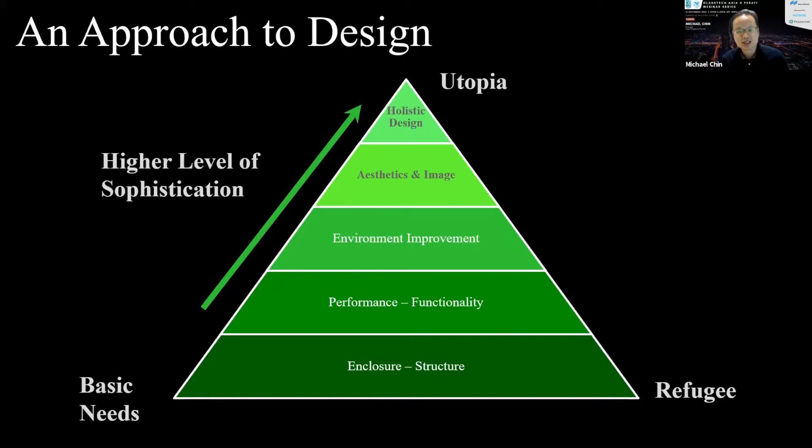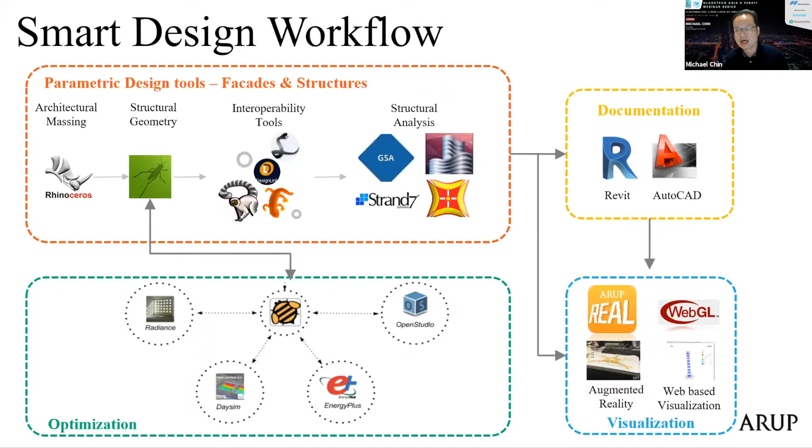And then facade optimization, your thermal performance, and then on the right hand side you've got your documentation, right? Revit, AutoCAD, something that we're very familiar with, and of course now we are even talking about visualization and augmented reality and all that. So without tools, without software, without digital, that's a bit hard to establish, although the thinking has been there for quite a while.

So today I will talk about 3 topics actually that we have been working on at Arup. First one is facade canvas. Second one is actually how we solve complex design issues, mainly our geometry and modulation studies. And of course, the last one is digital inspections.

So facade canvas is an in-house tool that we developed, right? And it's essentially our definition of parametric design exploration. We do exploration from time to time, and what we call optioneering, day in, day out, and what is the quickest way to do it. We want to do it as efficient as possible, because this process is essentially a circular process that goes round and round until you get a solution that you want.

And in the olden days, we kind of look at things in 2D, right? Obviously architects have their drawings, their elevations, their GAs, and of course when it comes to a different consultant, the structural engineers have one set of drawings. The facade engineer - at that time we don't even have facade engineers - he will be looking at his own set of drawings in that sense, and all of that becomes a bit hard to really understand, and also capture. Especially when you want to do design, it becomes even more difficult.

So now, with software, we are looking at single source of truth, right? We are looking at one model. Daniel talked about BIM and all that, and it's so common now. But essentially, for us facade engineers, we want it even more important that we do options again and again. And now we're even incorporating structural engineering tools into the software, what we call facade canvas.

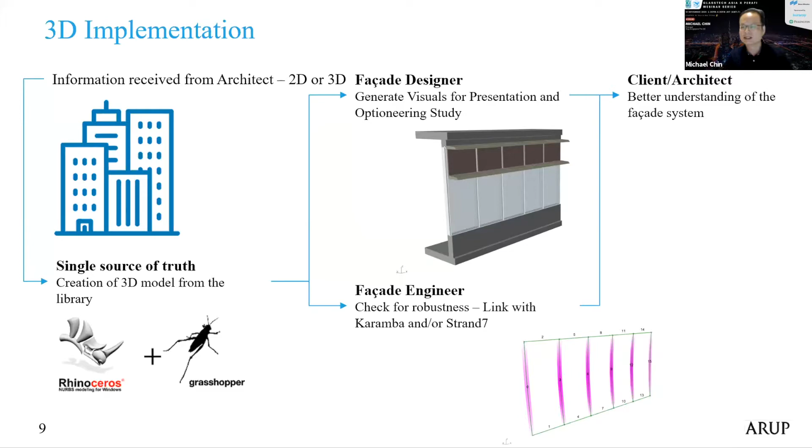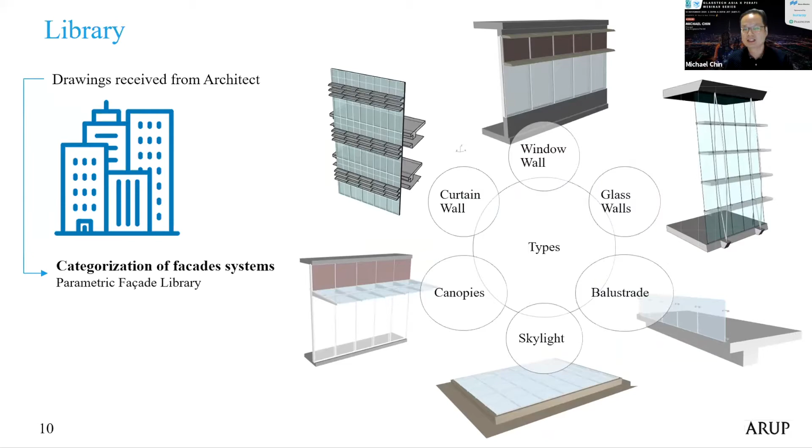So we are developing libraries, and you can see how we categorize the different facade systems. Within all of these systems will be quite familiar to you. Very often, for example, for curtain wall, we look at different options. So in one option you move the spandrel up, and in other options you increase the vision panels, or move the sunshades up and down.

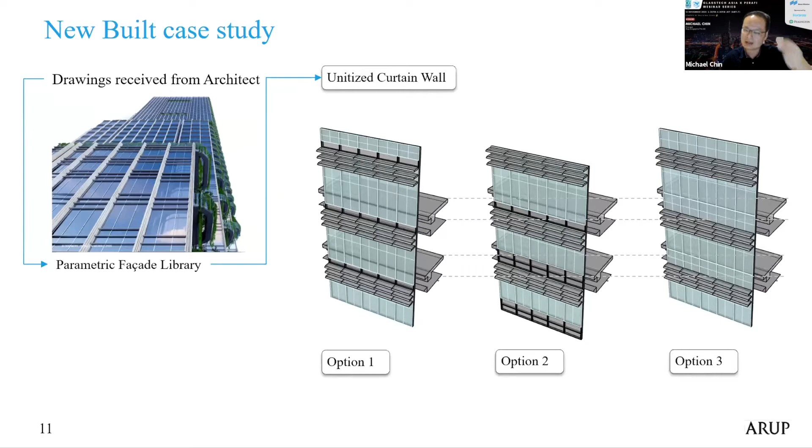When we were doing AutoCAD, that was a quite difficult process. Although we can imagine it, we don't really know how to convey that. So essentially using the software, built into a series of Rhino and Grasshopper scripts, we can quite easily get all of these things done very quickly.

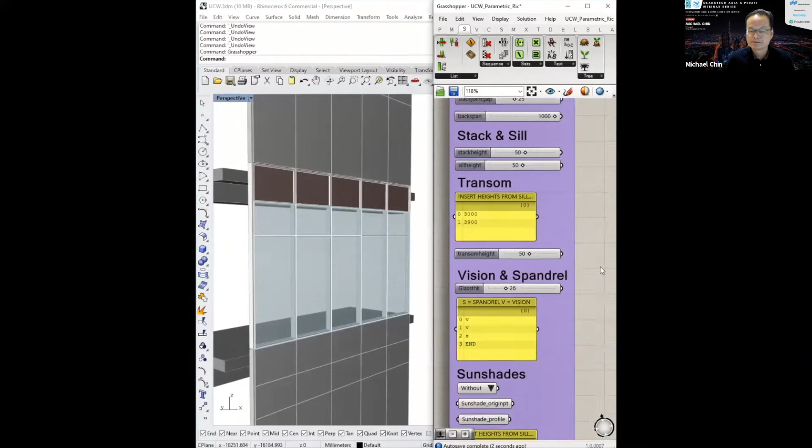So any options that you want to change within the parameters of this design, you can. Essentially all of these are just a few clicks away, and we get the different options. Similarly, in the case of refurbishment, we can also do the same thing, looking at parametric design in a very quick and easy manner. All of that is done in a software, a tool that we can eventually add more and more scripts to, to make our design process a lot easier.

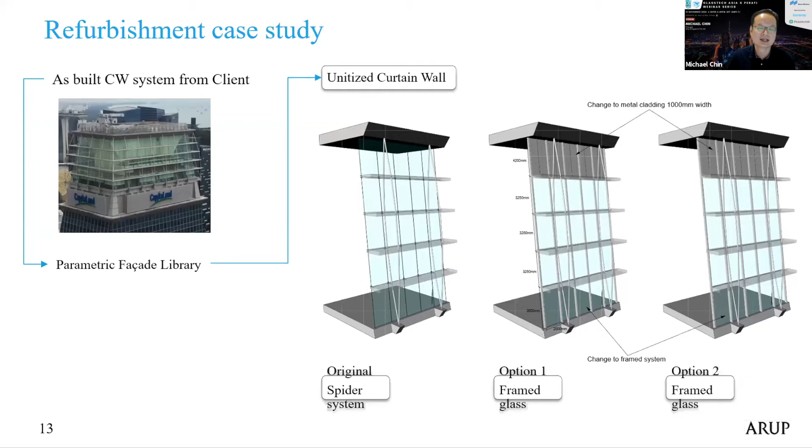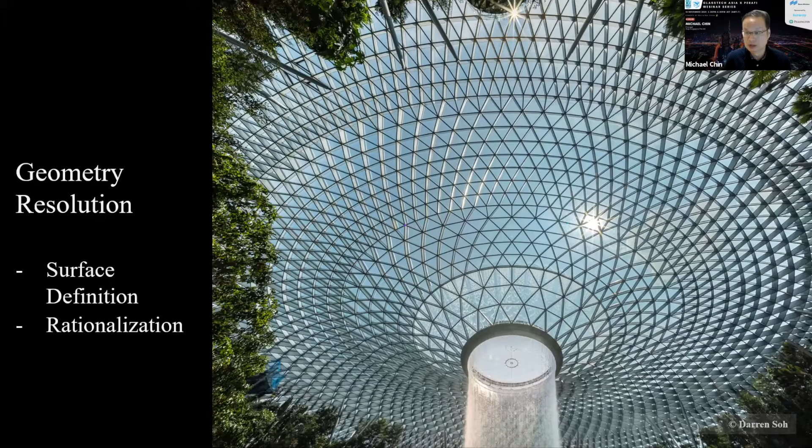Essentially we start with this. Of course the architect has his renders, and the competition is won. The architects and its early consultants, in the design stage, will essentially work out some of these inputs.

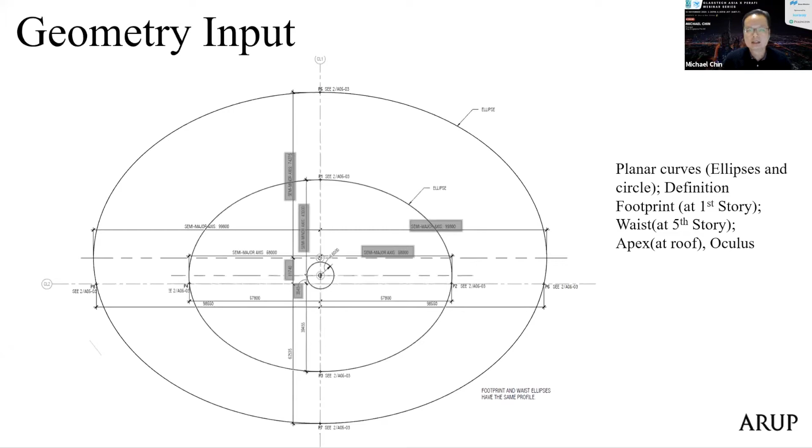Essentially it goes around a few parameters. This is something on plan, this is something on elevation, but there are a few points that the design or design concept has been given to us. You've got a point at first story, you've got the points at the ring beam which is on the 5th floor, and then you've got a top point, what we call a point on the roof.

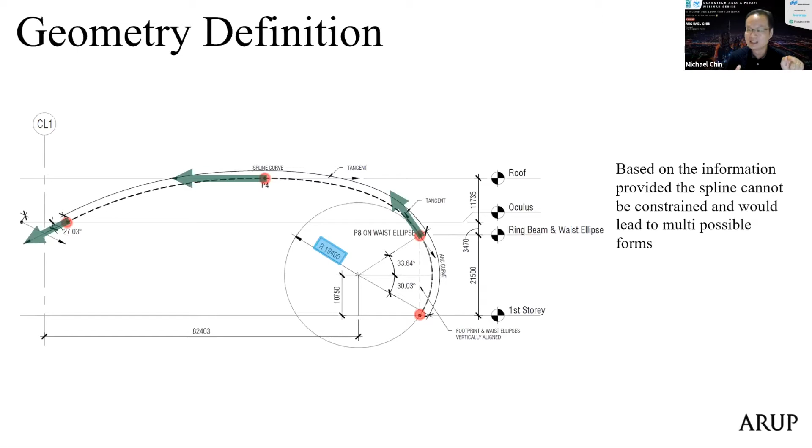And at the end of it, you've got the point at the end of the curve, call it the oculus, and that's where after this the water flow will start to come down. How do we get from here, or from all of these parameters, and build it into a shape that can be buildable? If you look at it, it's not just a series of arc curves with a certain radius coming to a certain point - it's actually a spline curve. When you say spline, it means it's essentially connecting two or three points together with the best curve possible, not confined to a specific radius.

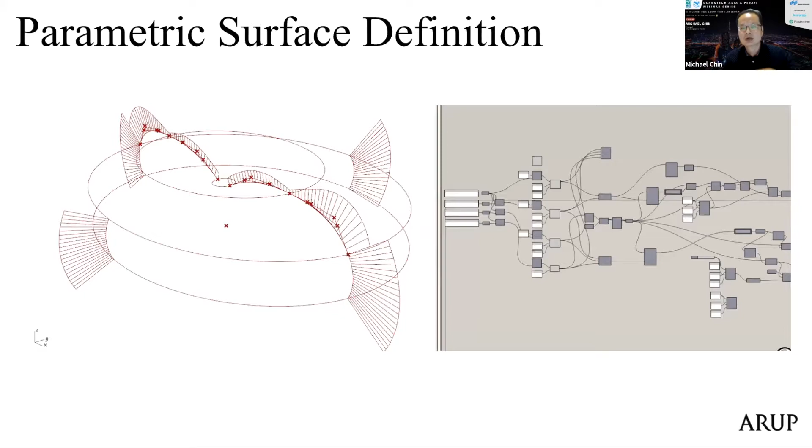Using scripting again, Rhino and Grasshopper, we had to look at what the existing geometry was. There's a model that was provided, and essentially we're going to look at a gradient at every point.

When you smoothen it, basically what we come up with is, when we actually build it to get to a structure, you need all the different elements. You can imagine all of these are segmented glass, and eventually every one of those pieces needs to be quite smooth. That's the reason why you can't conform to a specific geometry in that sense - it all depends on building requirements to actually form the shape that you want.

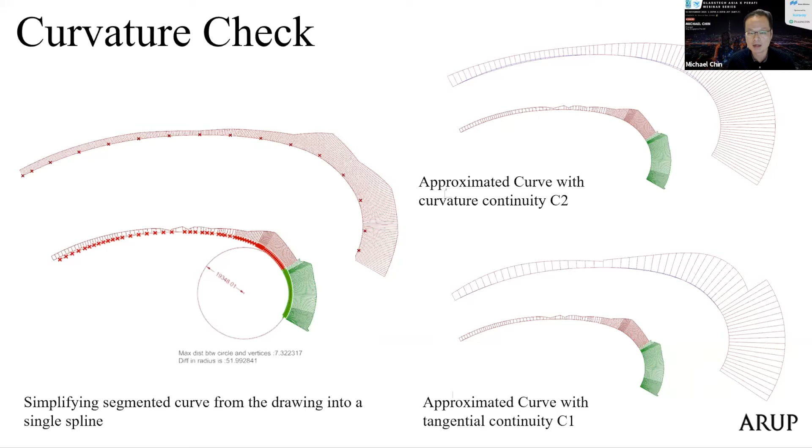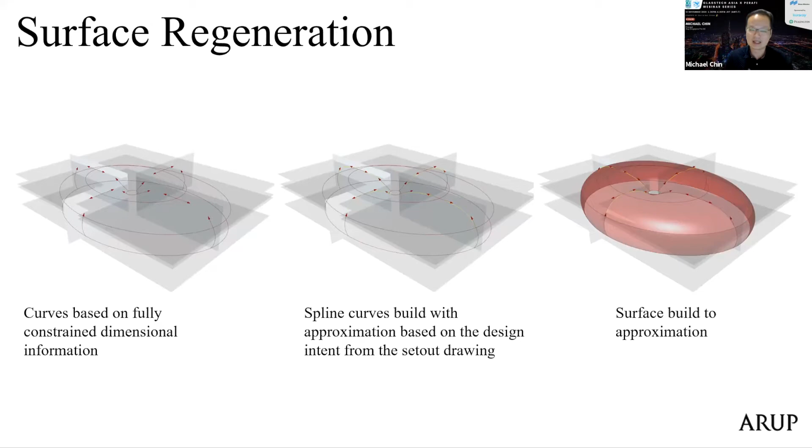So eventually, going through this process, we essentially build the curve, the curvature of that model - what we call surface regeneration - through this process, so that you can get almost a smooth kind of surface around the entire structure.

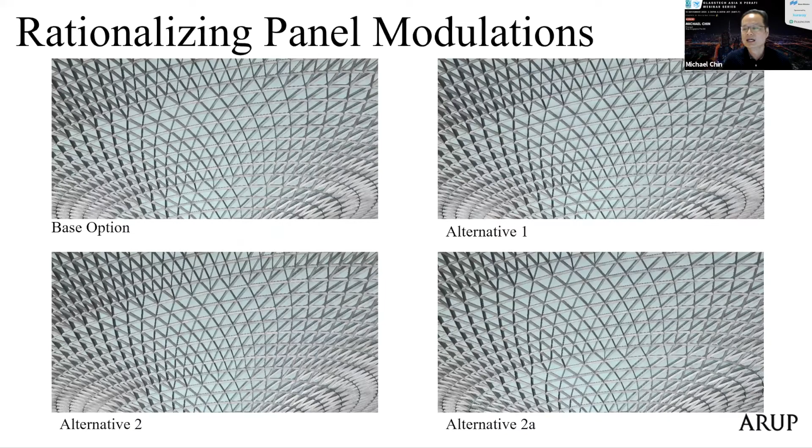And then once that is done, essentially you call that modulation, or the geometry is done, then you start looking at different options. All of this may look alike, but they are slightly different. That's where you essentially look at things like horizontals and the number of panels, and that led to the maximum glass size.

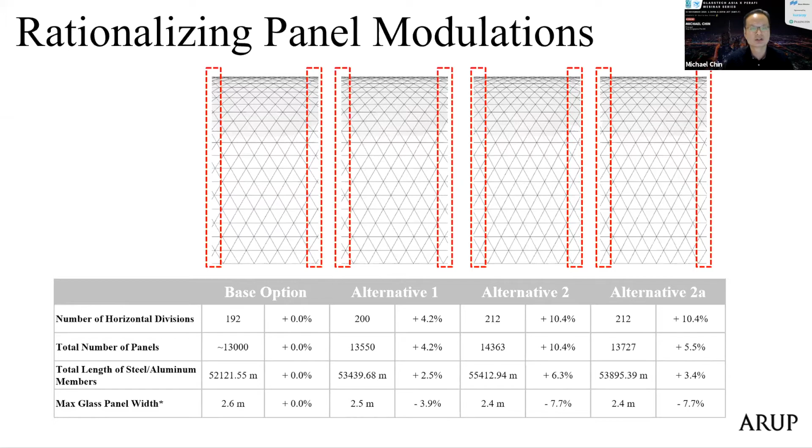Every one of them has slightly different modulation, which leads to different sizes and different quantities for different things. So without software, without digital, there's no way we can actually get all of these things out. Of course, you can do it by hand, but that would be painstaking.

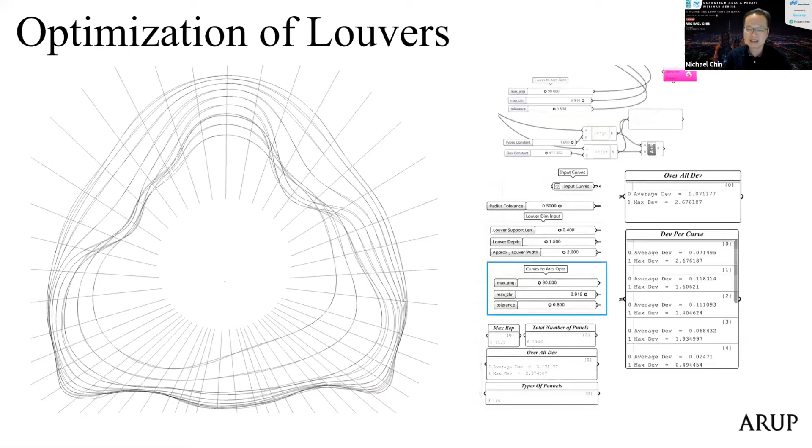And one different color means one different size. Every floor is about 2,300 panels. You can imagine, if a contractor is going to build that, it's going to run into big problems, and of course, big costs.

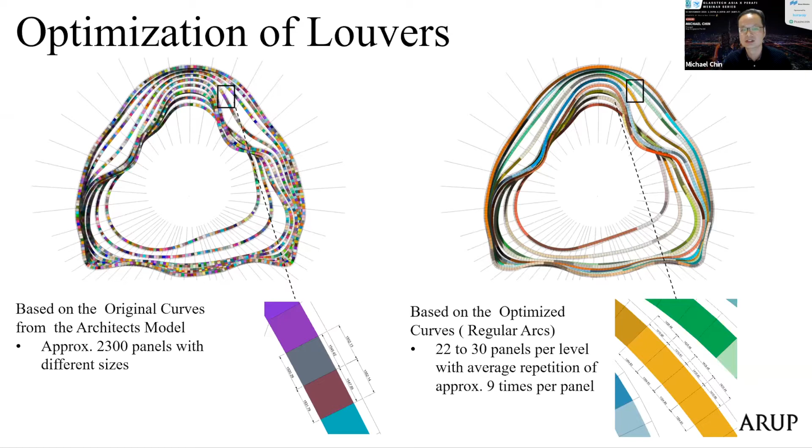Every piece is different, so you run it through with a series of scripting. Again, it goes to the right option. You kind of relax it, what we call a dynamic relaxation, and put it within certain boundaries using a script. Essentially, you can then smoothen the curve a little bit and bring your panels down to smaller and more regular repetitions. Frankly, you can't tell the difference at the end of the day.

So there are things like ETTV calculations, which are very familiar to you. BMU is always an issue - I won't talk about that today, but we've always done BMU in 2D. Maintenance is always an issue too. People can't imagine where the gondola would go and how this area is going to be maintained by the BMU, and doing all of that in 3D actually makes it a lot easier.

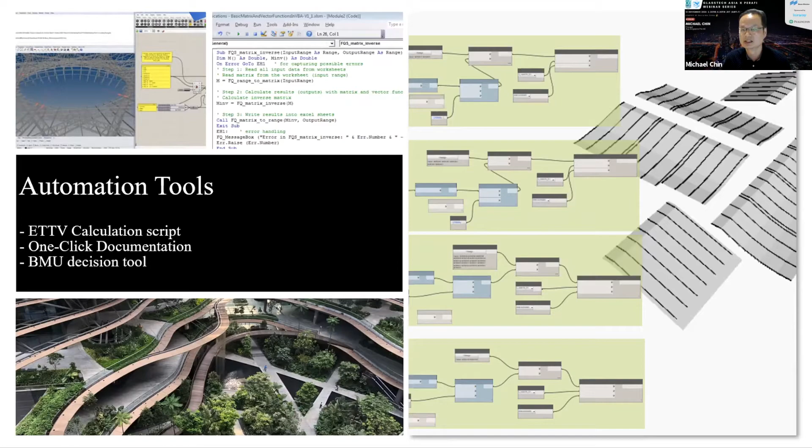ETTV is the same thing. It's no longer a regular shaped building where we can just use a spreadsheet to do our ETTV. Nowadays, all the buildings are curved, facing different directions, and by using a script, you can easily get the ETTV out quite quickly.

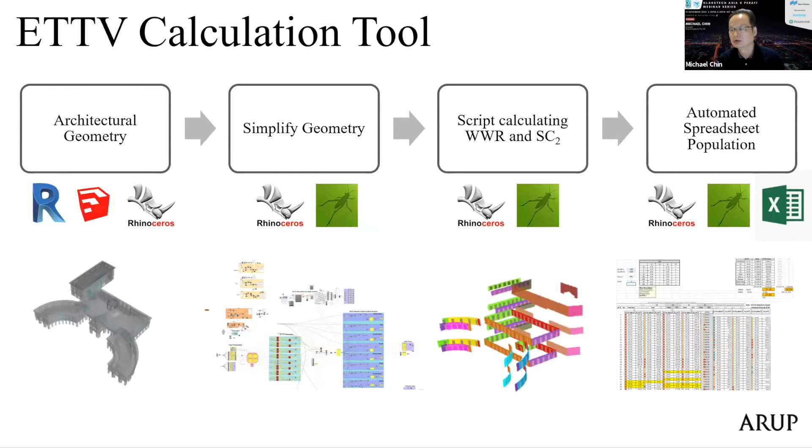The thing is, what are facade inspections, and how have we typically done it in the past? You imagine, how can you actually do that? Previously you go down to the gondola, the inspector has his 2D markup drawings, and then you go down every floor, inspect, and try to mark it up on the elevation if there are issues - depending on one inspector doing it all. He's the eyes and the ears, trying to do quite a few things at the same time, and of course he's up there hanging out in the air.

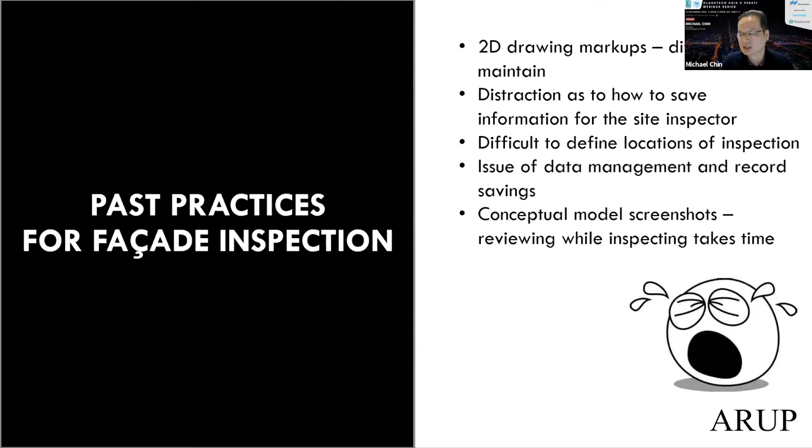And then at the end of the day, you can imagine all of this data being compiled in piles and piles. It's not easy, and it's very time consuming. One full building inspection, medium size, the last time around probably took us 6 to 9 months to complete. That is definitely too much time, and not very efficient and not very accurate.

So then Arup started to look at it and see how we can streamline this workflow - we call it digital workflow. And we started looking at model preparation. Is there something we can do on that front?

After that, we start looking at every stage of our inspection process to make it smarter and more efficient. It runs across model preparation, coding and programming, and of course the physical inspections. We've still got humans hanging there outside in a gondola, but we also start using drones and other tools to help us. And the final one is report writing, where you shouldn't underestimate your piles and piles of data, and how to make sure those numbers are accurately captured.

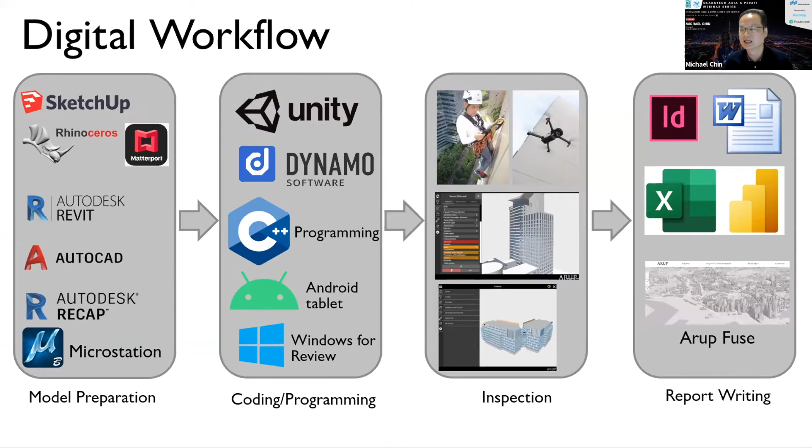I'll start with the model preparation. If you've got a building with as-built drawings, it's easy. We built a Revit-like model from scratch, essentially built quite quickly using the as-built drawings.

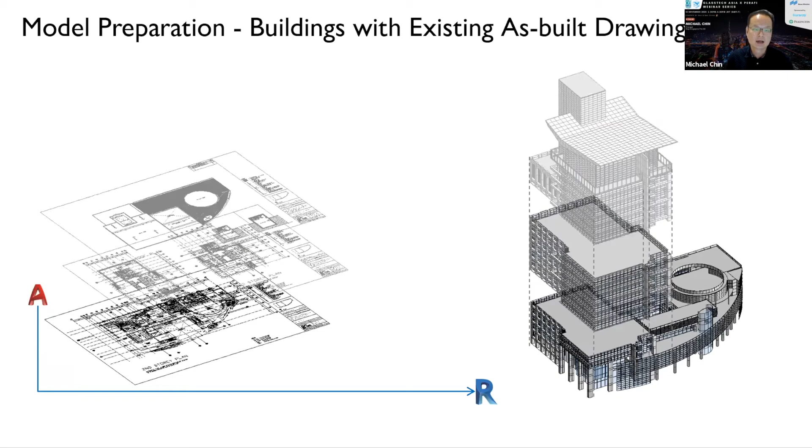But sometimes existing buildings don't have as-built drawings, because they're quite old, and that's where some of the problem lies. We've got to use tools like the Matterport scanner and drone scanning devices to build the surfaces from ground zero, essentially building a model based on the scanners we have in the market.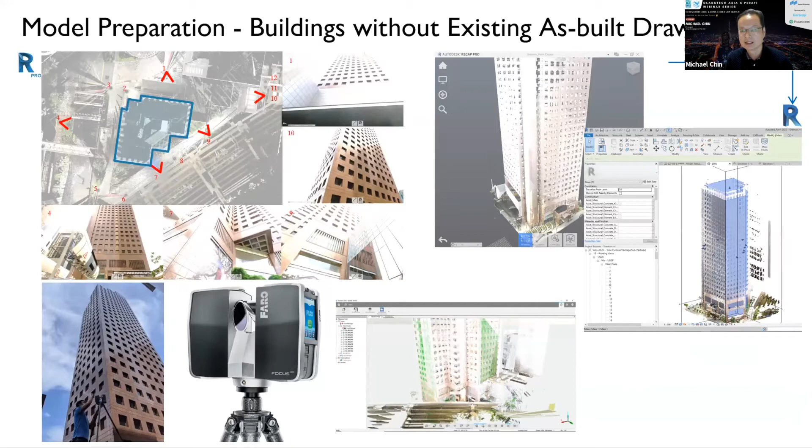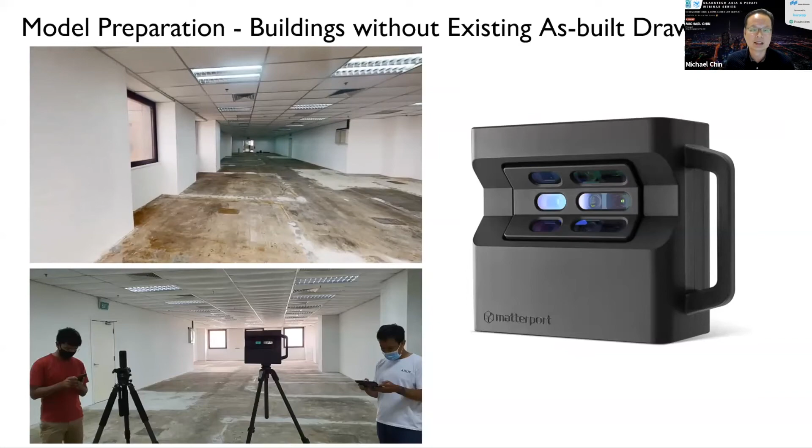Using that, we then work with the existing Matterport scanner, the LiDAR scanner, on the internal front. For clear spaces like that, you can actually get quite a good model, and it's quite accurate.

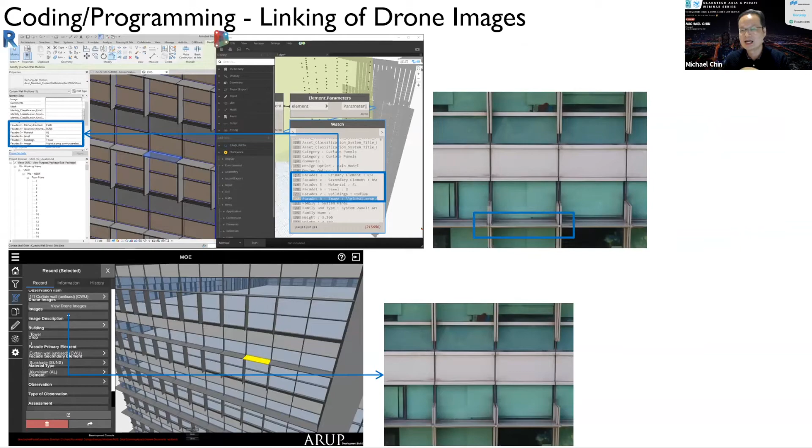Then after that we start the difficult part. Essentially when we build a model, it's kind of like a surface model. When we have a Revit model, we actually need to link each and every one of the images, or the drone images, to the element in that model, so we know exactly where the defective elements are.

The whole process is built around this: you've got your drone going up and down, or a human going up and down, collecting 10,000 photographs for example, and linking them. Previously you'd mark it up on your 2D elevations; now you immediately mark it on the model itself, using either the drone images or a human holding an iPad or Android device linked to that model.

So it's a lot more accurate, and the data is stored immediately. There's no difficulty or inefficiency in retrieving the files later.

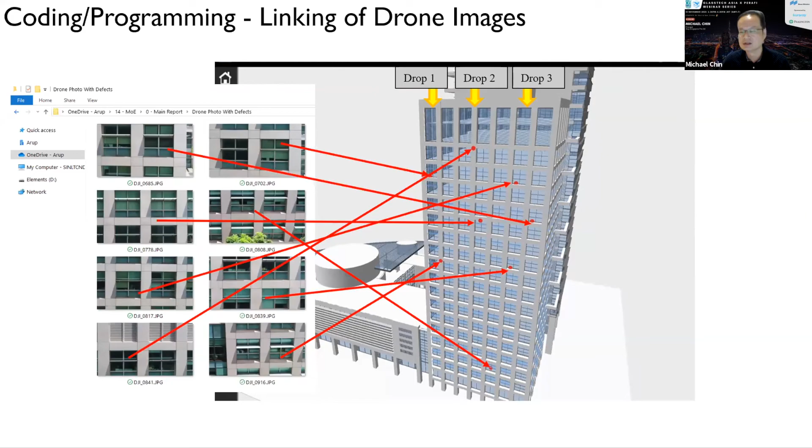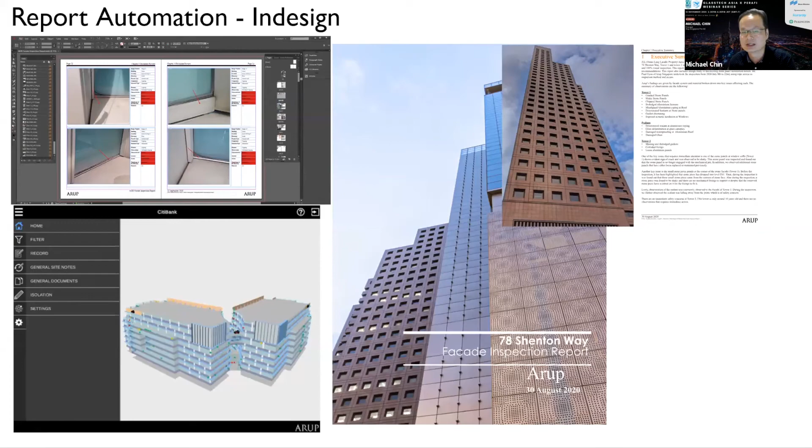There's very little we need to add on, except maybe the executive summary at the front and the summary at the back. The best thing is we can get data out of it—we know how many defects the building has, and we can generate charts, which makes it a lot more interactive. A person looking at it will know, for example, that the southeast or northeast elevation seems to have a lot more defects compared to the other three elevations, so the data can be communicated more effectively.

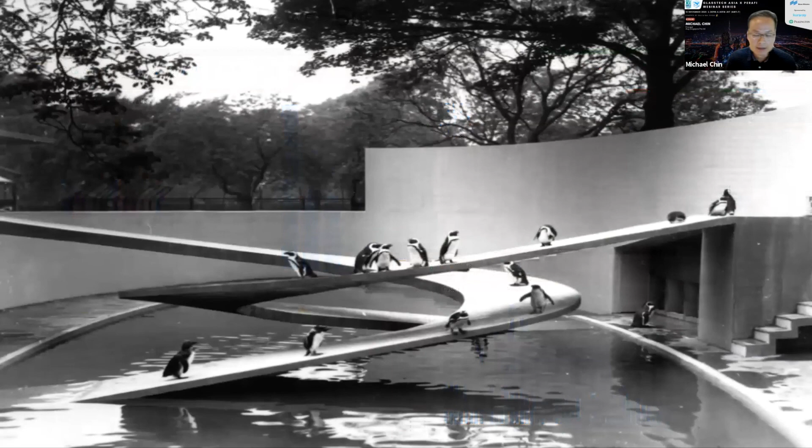I think that's my last slide. This is essentially the first project in Arup—Arup's first project, the penguin pool in the London Zoo. It was the first project built quite closely together with architects and contractors, using expressive and structural precast concrete. During those times it was really quite special to have a structure based on concrete like that—thin and very expressive.

That process is attributed to the whole concept of total design. Back in the 1970s and even earlier, the thinking was always to approach design as total design, rather than every discipline working separately, so that different disciplines work together to produce a product. So my last point is: we have all these digital tools, but they are all enablers. The main thing is don't lose sight of the design itself—it's all meant to help us deliver a better design at the end of the day.